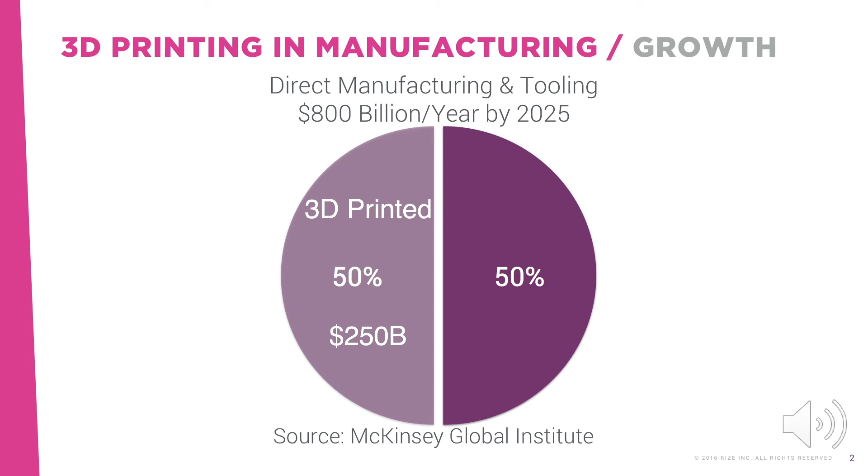If you run your company's manufacturing operation, you're well aware that you're tasked with producing better products faster while cutting costs, increasing production uptime, finding a way to efficiently meet customer demands for customized products, and support your organization's innovation initiatives that impact all your organization's processes and products. It feels like a daunting task, and maybe even mutually exclusive in some cases.

With so much manufacturing revenue predicted for products manufactured with 3D printers, how can you harness 3D printing tech to meet these goals and improve your manufacturing process?

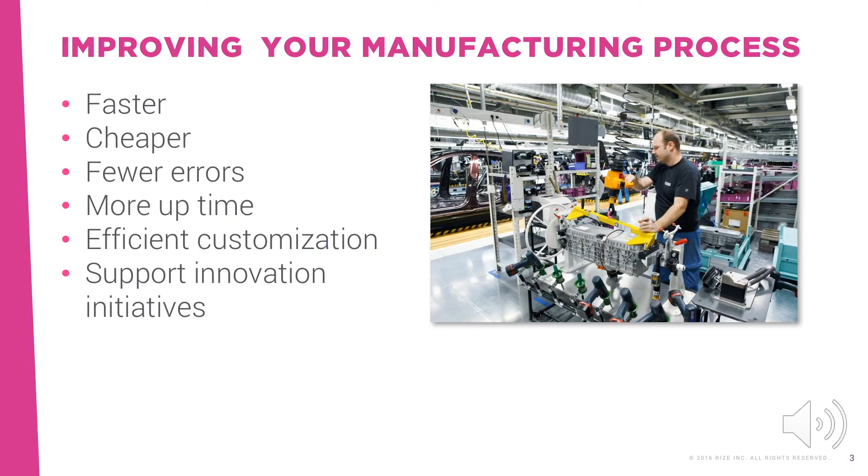In this webcast, we'll talk about 3 key ways you can use additive manufacturing to improve manufacturing at your organization: augment your additive manufacturing lab systems, 3D print replacement and custom tooling, and 3D print short-run, custom, end-use parts outside the lab.

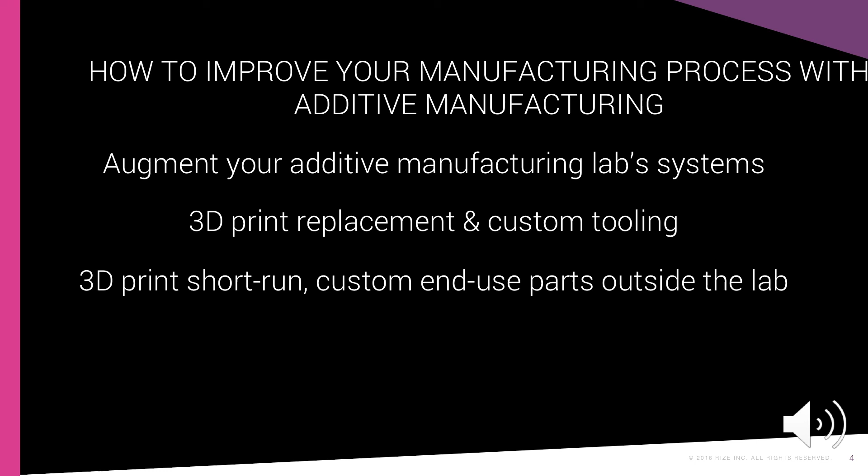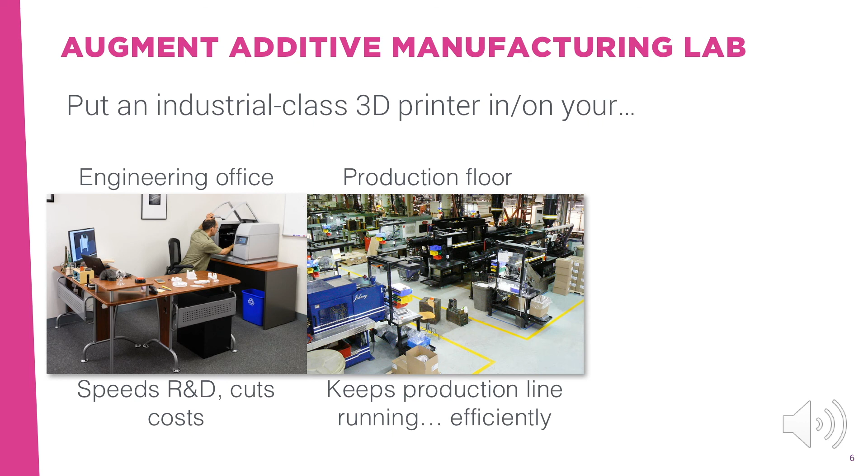First, augmenting your additive manufacturing lab systems. You can augment the systems in your additive manufacturing lab with industrial 3D printers placed in your engineering and design offices to speed your R&D process and cut costs, right on the production floor to keep the line running efficiently, and in the field so you can accommodate your company's innovation initiatives, not the other way around.

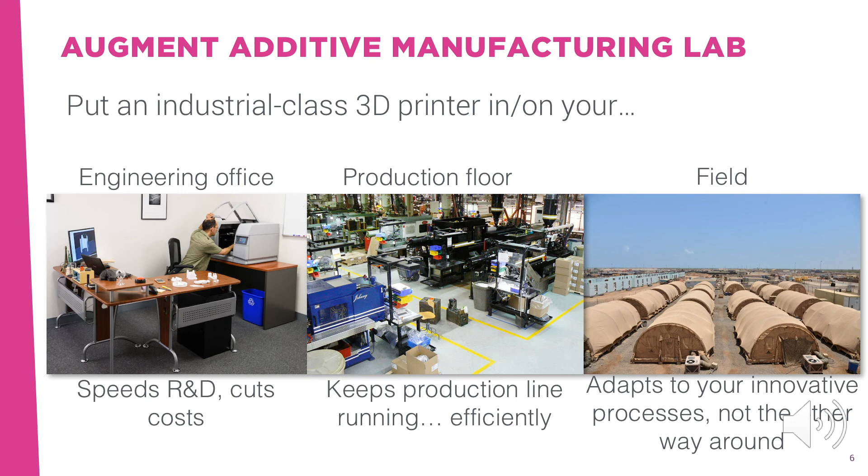Putting a 3D printer in the office, on the production floor, and in the field offloads overburdened lab managers. Many lab managers welcome the idea of putting printers in their engineering offices so they can print their one-offs, leaving the big jobs for the lab.

Gary Rabinovitz, additive manufacturing lab manager at Reebok, said a nearly zero post-processing and environmentally friendly 3D printer would enable their designers to 3D print themselves and reduce some of the workload from the lab.

And John DePiano of Boston Engineering said it's so convenient. Whenever we need to print a part, it's right here. We just print it and we have it. We don't have to wait in the queue for the lab.

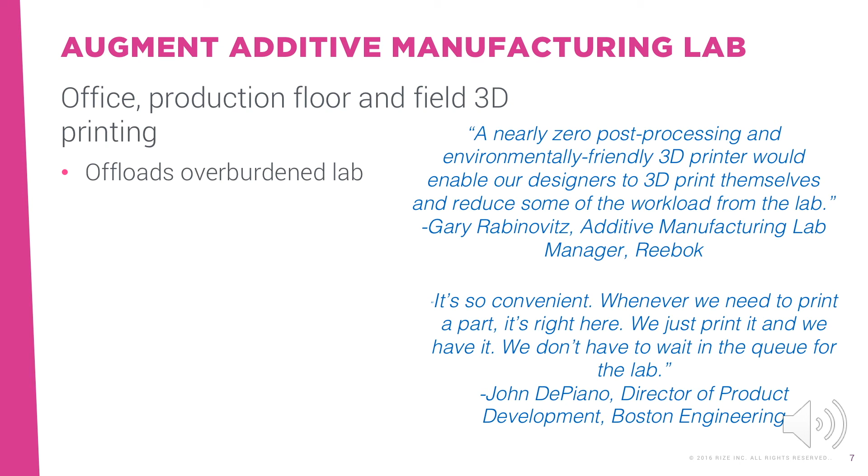This helps reduce bottlenecks created by overburdened labs, speeding part delivery, design iterations, and time to market, all while cutting costs.

According to Boston Engineering, not only was the purchase price of the Rize 3D printer a fraction of the cost of the FDM system, the Rize material costs are less than half the cost of FDM, and there are no labor, facilities, disposal, and material costs associated with post-processing that need to be incurred with the lab's FDM printer.

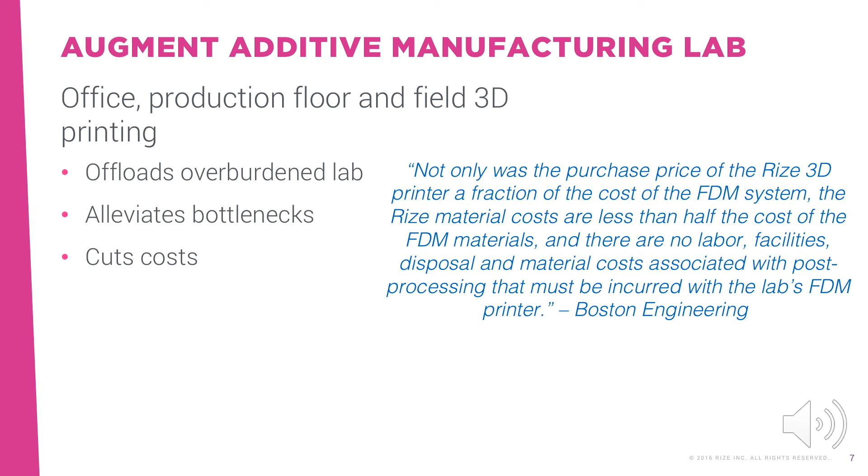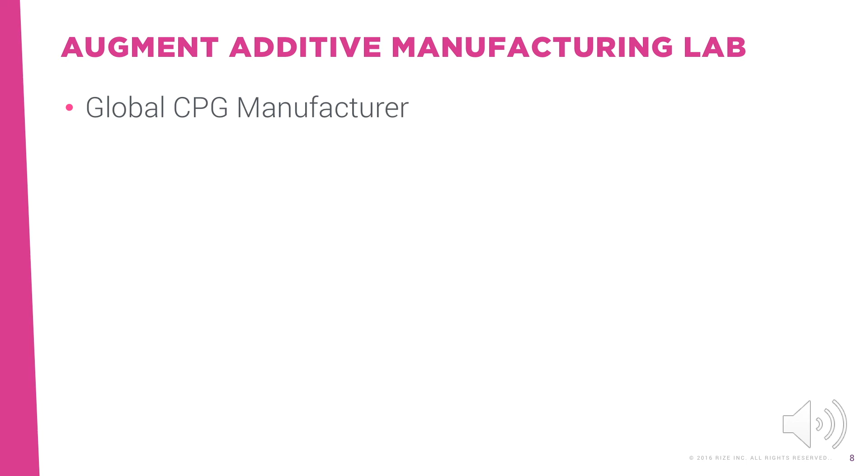A global consumer packaged goods manufacturer reported that augmenting their Fortus lab system with their Rize office system yielded the following results: 20% faster in days per idea per engineer than Fortus, their lab machine, more iterations, 25% more concepts per engineer than Fortus, or an additional iteration, which means better designs in the same time frame.

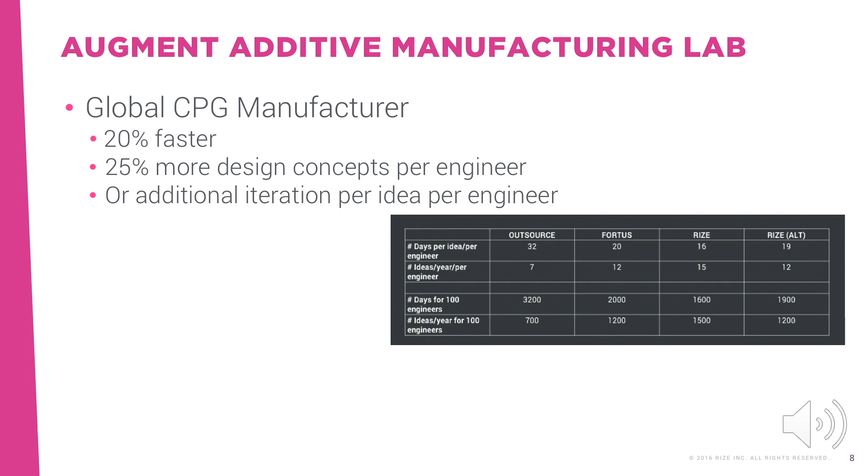They estimate that part delays due to post-processing amount to 48 days per engineer per year. Times 100 engineers, that's 4,800 days in total part delays per year. They estimate that those delays are costing them millions of dollars annually.

Boston Engineering reports that augmenting their lab system by placing a Rize 1 3D printer in their engineering office sped part turnaround time by 50%, and it also cut costs by the same amount.

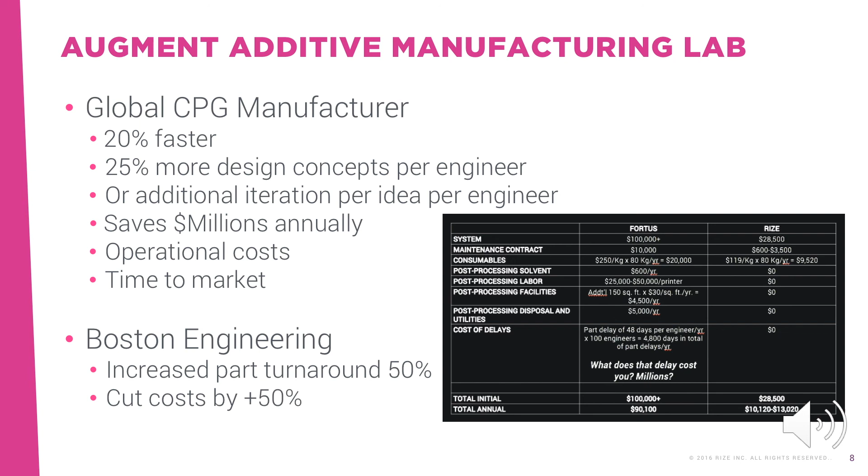Next, we'll discuss how 3D printing replacement and custom tooling can improve your manufacturing process. You can place an industrial-grade 3D printer right on the production floor to print replacement parts when and where you need them, to keep the line running, to design and build custom parts in hours instead of days or even weeks in order to significantly speed the process.

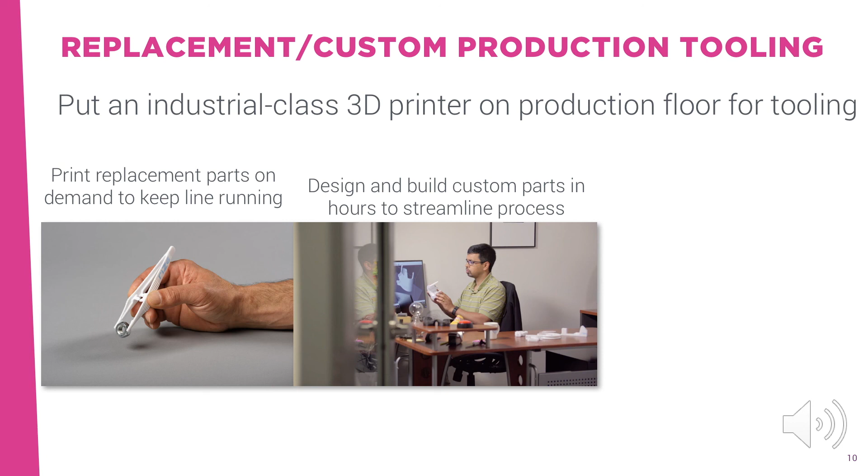This changes physical inventory into digital inventory. All of this significantly speeds the production process while cutting costs. Transforming physical to digital inventory eliminates inventory space, prevents parts from becoming obsolete, and ensures you don't run out of inventory.

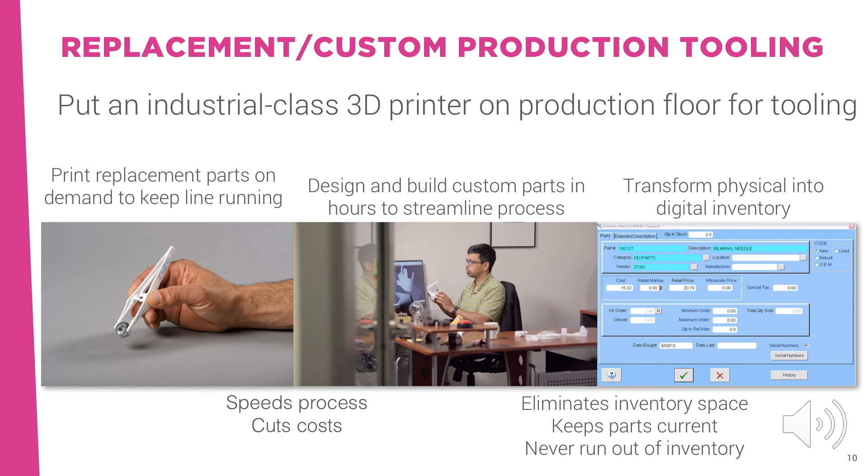The final way additive manufacturing can help improve your manufacturing process is to 3D print short-run, custom end-use parts outside the lab, in the field, whenever and wherever they're needed. I'm talking about placing an industrial-class 3D printer right in your tool shop, auto mechanic shop, or doctor's office to manufacture one-offs of custom products, such as replacement parts, aftermarket and custom auto parts, custom medical and production tooling, dental devices, and surgical guides. As we've seen earlier, breaking the chains of the additive manufacturing lab and placing manufacturing where and when it's needed results in enormous efficiency improvements in time and cost, and enables you to offer new, customized products and services that can't be produced any other way.

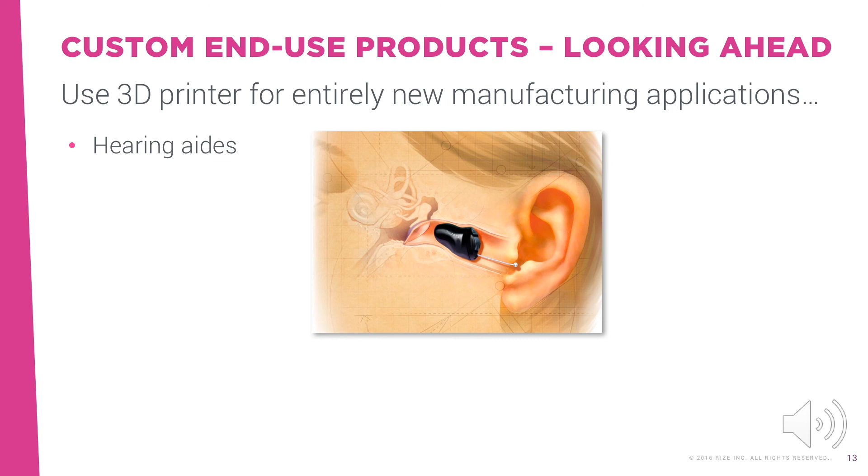Within the next few years, you'll even be able to 3D print products like hearing aids with both hard and rubbery surfaces for maximum performance and comfort, antennas, smart sensors, microchip heat sinks, actuators, and circuit boards. It will be possible to use additive manufacturing to produce products with flame retardant, conductive, and static dissipative materials.

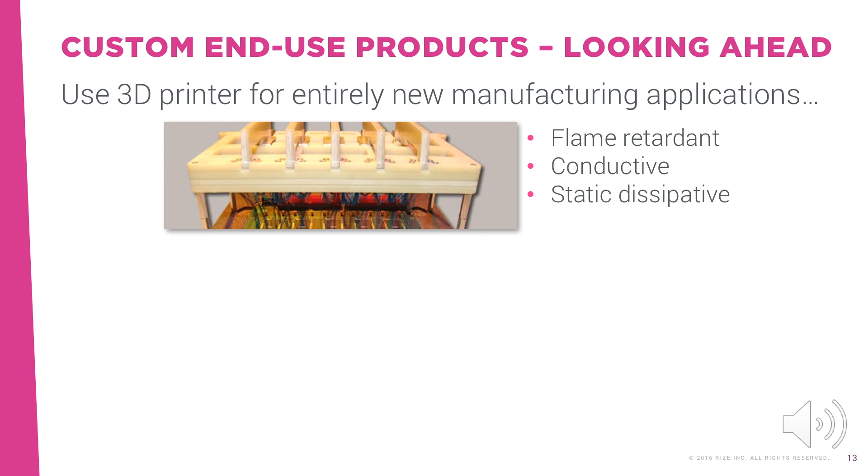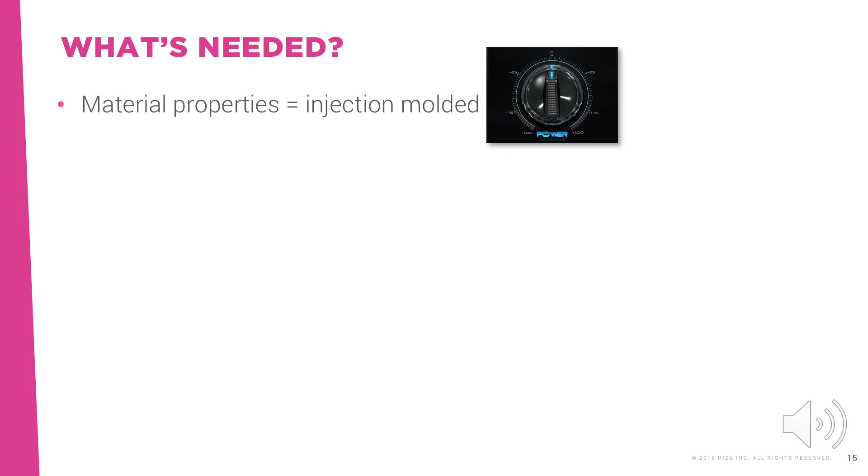But what's needed in additive manufacturing capabilities to enable manufacturers to implement these three process improvements? Products manufactured using 3D printers will need to have the same material properties like strength, surface finish, HDT, etc. as injection molded parts. They'll need to be in the same full color that you'd expect from parts manufactured using traditional means. If you're going to put a printer in your office or on the production floor, in the field, or in your medical office, the process needs to be clean and safe without harmful outgassing, and the materials must also be safe.

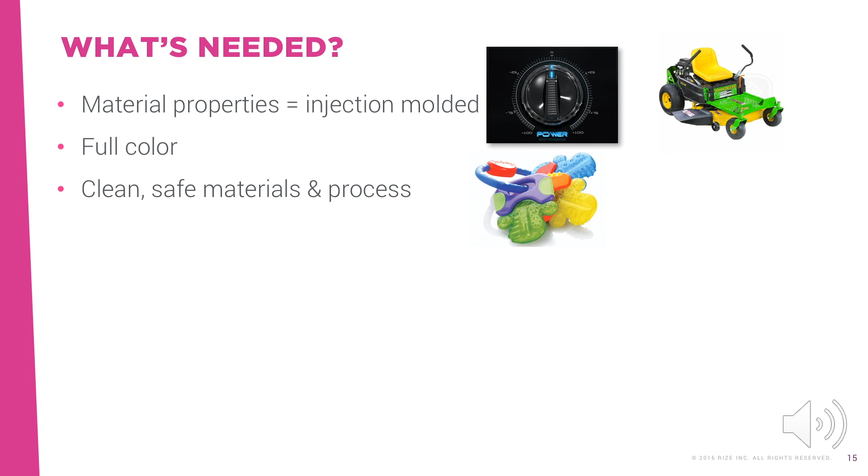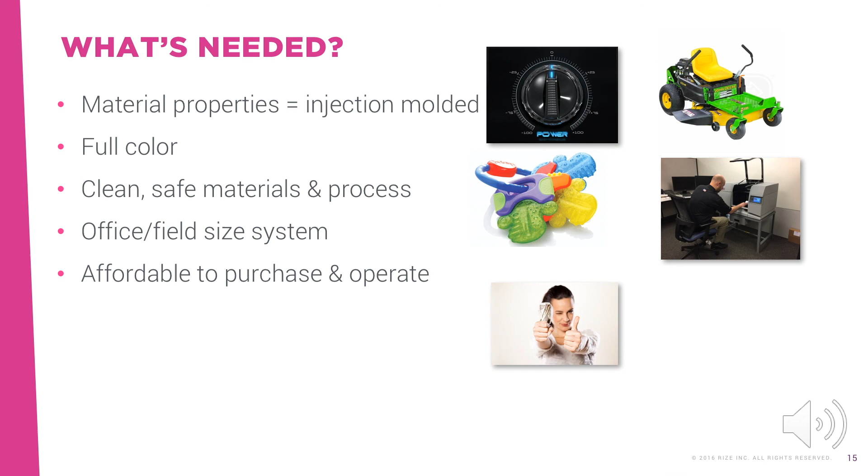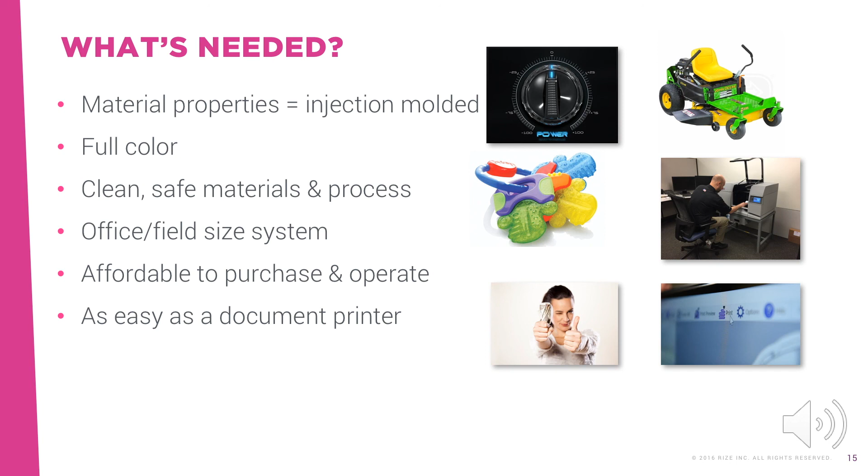In addition, the system must be small and light enough to be placed in any office or field environment, yet have a large enough build volume to print most parts needed. Since you're using the printer in part to gain cost efficiencies for your low-volume manufacturing process, it must be affordable to purchase and, more importantly, to operate. Finally, since the printer will be operated by mechanical and manufacturing engineers, mechanics, soldiers, doctors, and people who aren't experienced users, it must be as easy to use as your typical document printer. You just want to send your file to the printer, press print, and have your usable part or completed product a few hours later.

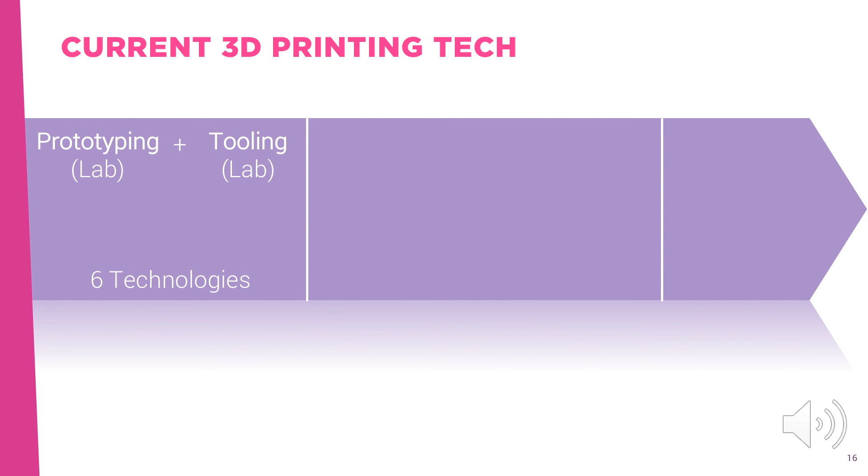But the reality is that today's printers can't meet all of those requirements. At one end of the spectrum, you've got 3D printing tech that serves prototyping and tooling applications, and those professional systems must or should be located in labs. Or you have the hobby printers that simply don't meet the needs of industrial and commercial applications for a variety of reasons. At the other end of the spectrum in manufacturing, we have the metal 3D printers, and we also have the likes of HP and Carbon that are forging a path legitimizing 3D printing for manufacturing. But all of these systems must remain in the lab. They can't break out into the manufacturing environment, and they require you to make other sacrifices in complexity, time, cost, and even material properties.

There's a big gap between prototyping and manufacturing. These technologies can't address the enormous market for functional prototypes and custom one-offs of production parts on demand in an office, next to the assembly line, in the mechanic shop, you name it.

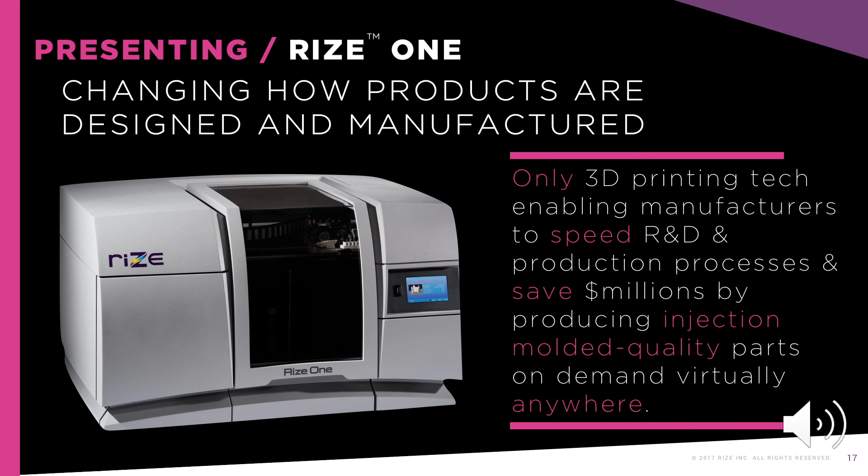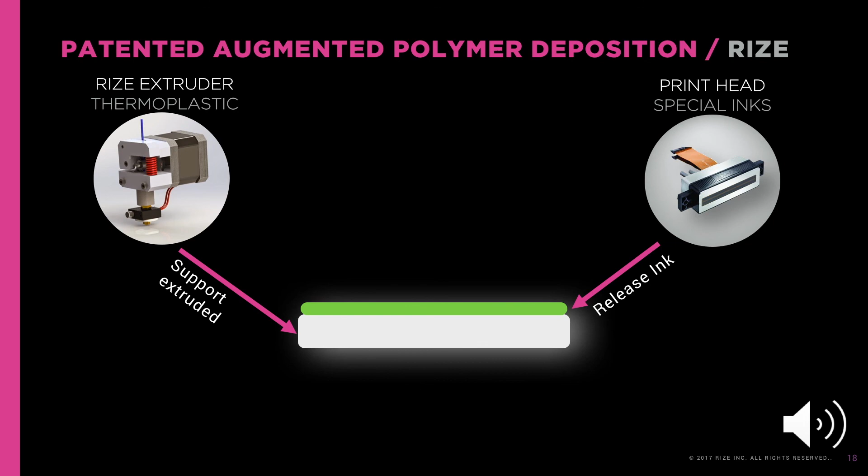Here's how APD works. It involves a simultaneous extrusion of our own compound of medical and engineering grade thermoplastic and jetting of special inks. The thermoplastic is extruded first, forming the support. Release ink is jetted between the support and the first layer of the part. Thermoplastic is extruded, forming the part layers. Special inks are then jetted between the layers of the thermoplastic to change the material properties voxel by voxel.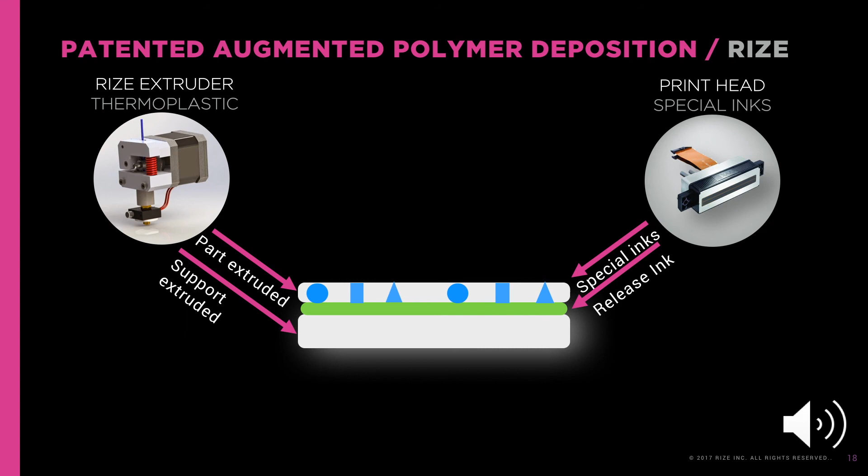So what does this process provide that differentiates us from existing technologies? Well, as I mentioned earlier, the holy grail of the 3D printing industry is to produce injection molded quality parts quickly and affordably. But today's 3D printers have complex and tedious pre-processing that requires additional software.

Post-processing is slow, very expensive, messy, and unsafe. Other technologies have limited material properties. They don't have the suitable strength versus manufactured products. Access to industrial 3D printers is limited to labs.

This causes delays and bottlenecks, and the process must accommodate lab limitations. They have limited or no color. They have unsafe and messy materials and processes. Those processes cost companies millions of dollars annually, and it limits the adoption of the technology, and they can't enable new applications and markets.

Rize, on the other hand, tackles this. We offer effortless auto pre-processing with no extra software required. We have virtually zero post-processing, which means 50 to 100% faster time to usable part. Our parts are 2 times stronger than the competition, and we offer variable material properties and injection molded quality.

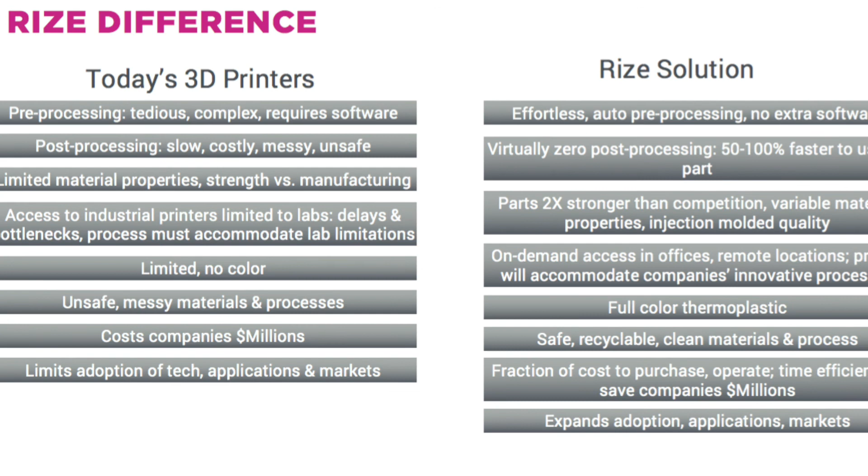We have on-demand access in offices, remote locations, and our printer will accommodate your company's innovative processes. We offer full-color thermoplastic. We have safe, recyclable, and clean materials and process. And our technology is a fraction of the cost to purchase and operate. This results in time efficiencies that saves companies millions of dollars a year. All of this expands the adoption of the technology and enables applications and markets that are not possible with any other 3D printing technology.

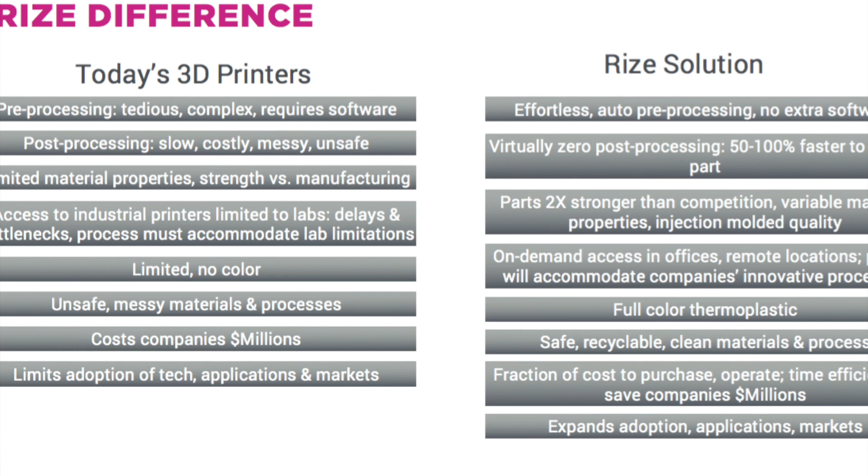Our simultaneous extrusion jetting APD technology enables us to 3D print replacement parts in the field, custom tooling, and so forth. We can do this today.

Looking ahead in the not-too-distant future, we'll be able to print the kinds of products we talked about earlier: industrial brackets with composite materials, functional fillers, microchip heatsinks with defined microstructure materials, multi-layer batteries with smart sensors, hearing aids with variable hardness, even flame retardant materials, conductive materials, and more.

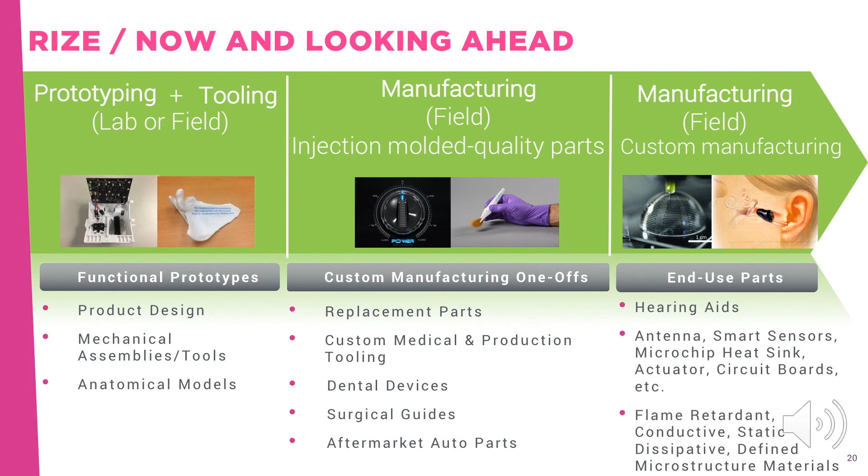So let's return to our original checklist of improvements you need to make to your manufacturing process, and how using Rize additive manufacturing technology to augment your additive manufacturing lab, produce custom and replacement tooling, fixtures, and jigs on the production floor, and build one-offs of custom end-use products in shops and doctors' offices meets those needs.

You need to speed your production process. Using Rize technology to build injection molded quality parts on demand outside the lab can speed your process by 100%.

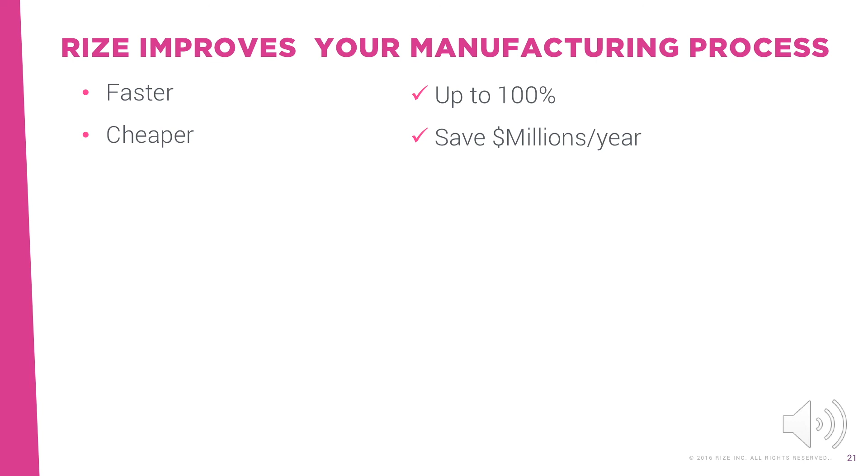You need to cut costs. Using Rize can save you millions of dollars per year in labor, facilities, materials, time to market, and other significant expenses. You need to reduce part errors, and since Rize increases the number of iterations each engineer can do per design, the accuracy of the part improves.

Plus, you can enhance the accuracy and efficiency of your production line by printing custom tools on the fly. Customers also demand increasing customization, and it's a way for you to differentiate from your competitors, but it's difficult to customize efficiently. Rize cost and time efficiently enables you to produce one-offs of customized injection molded quality end-use parts.

More and more companies have VPs of innovation or chief innovation officers who are charged with turning processes and products on their heads in an effort to differentiate themselves and make the kinds of improvements we've discussed. While lab machines restrict innovation and require a company to work around its limitations, Rize accommodates your needs. You can run it virtually anywhere, by anyone in the company, at any time.

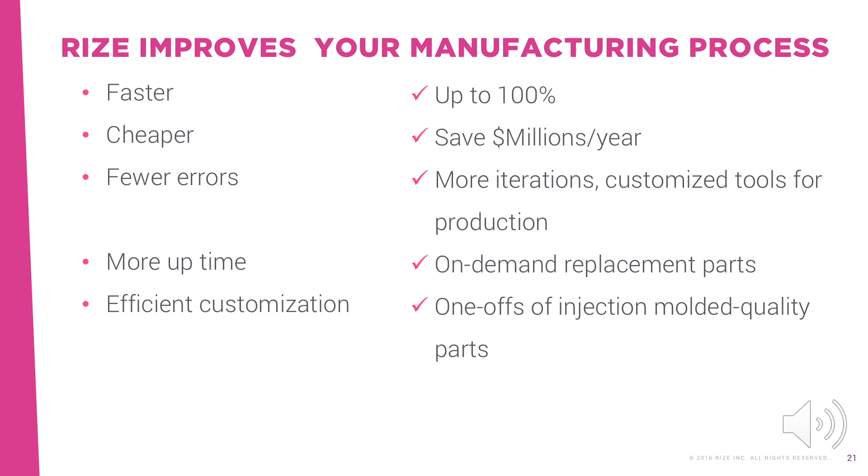Finally, please allow me to tell you a bit about who we are. We're a 3D printer manufacturer just outside of Boston.

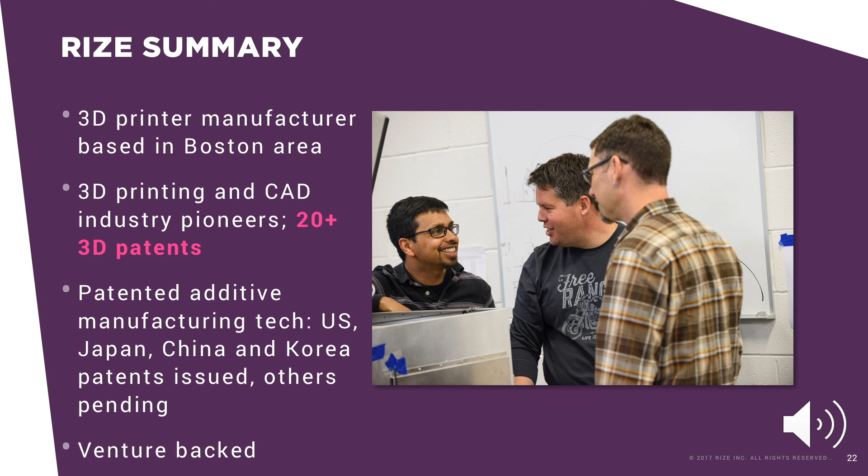Rize was founded by and has a team of 3D printing pioneers, mostly from Z Corp, with more than 20 3D patents to our name. Our APD tech is patented in the US, Japan, China, and Korea, with patents pending in Europe, and we're venture-backed.